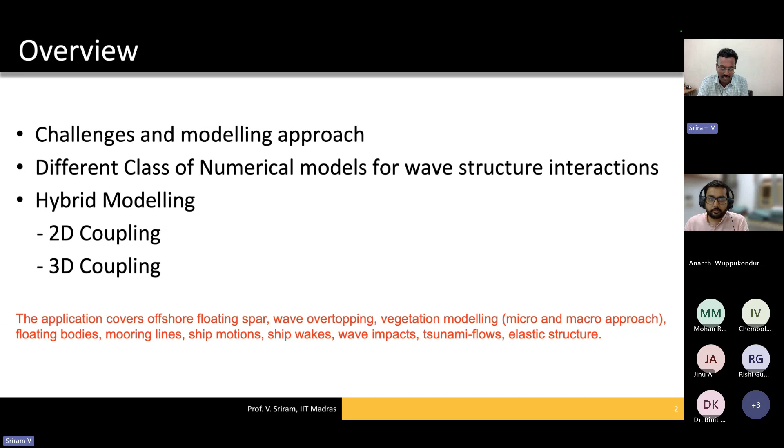So if you look at the motivation or introduction to the ocean engineering part, there are two challenges which we normally have. One is, from the ocean engineering perspective, we are going to have a large spatial domain as well as time scale.

Say, for example, if you have a breakwater or a groin field, the sediment transport phenomena is going to be a large spatial domain, correct? As well as the time scale is going to be of the order of years to develop. So it is not going to be a short-term contribution.

Or in the same aspect, we do also have a small spatial as well as time scale, wherein you are trying to look at the structural impact due to breaking waves, which is of the order of seconds, basically. So that means one needs to develop a numerical model that can understand this large spatial domain as well as the time scale, because you need a large computational domain if you want to model this part.

So how do we approximate, how do we minimize this aspect? And the same way, we also need to capture the small eddies, small phenomena, in order to study the physics behind it. So that means you need to have two scales of problem to begin with. Any numerical model which you try to develop should handle these two aspects. So that was the overall goal, mostly in the numerical model community.

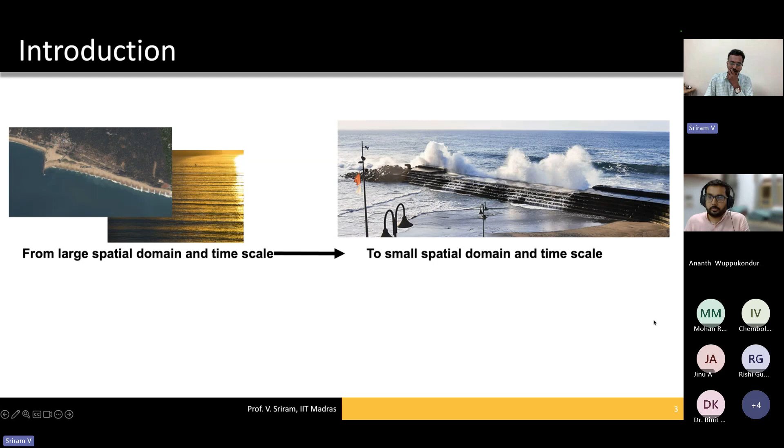So for these different physical problems, people try to use different levels of modeling. If you want to model a small time scale or small horizontal spatial scale, like for example, soil structure interaction or wave breaking or turbulence, you need to concentrate on highly resolved models, or you call them depth resolved models. That's what we normally use. There, the wave structure interaction process is going to be dominant.

Whereas in the case of a large time scale, say for example, a 10 years duration, or after 1 year, what could happen to my entire shoreline? So it's basically morphodynamics modeling, wherein you cannot use the complete physics; you have to go for empirical or statistical based modeling. So when you go for an increasing level of approximation, you have a lot of approximation involved in resolving the spatio-temporal scale problem.

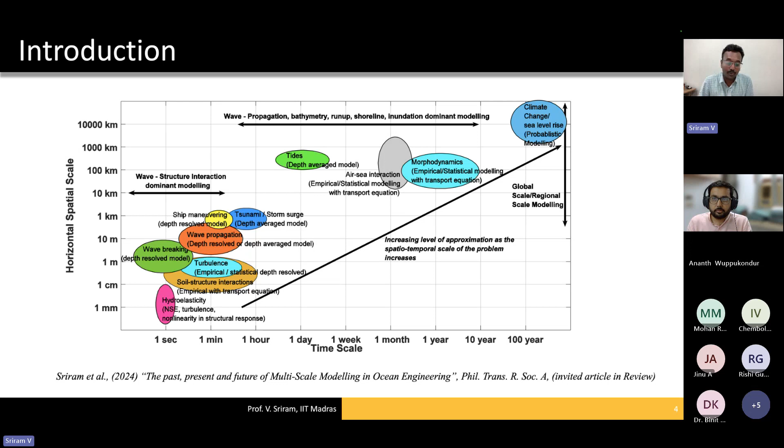But later on, people also thought, is there any feasibility wherein you can actually have only one model that can cover this entire scenario? So that is where hybrid modeling comes into the picture. Hybrid modeling in today's context is more or less well understood when compared to 10 years back. But still there are a lot of challenges, a lot of things which we can improve on. That's what we will try to discuss in this particular talk.

And as I told you, the challenge in the ocean engineering community is basically a large area of hundreds of square kilometers, as well as wave conditions that are completely non-linear. They also coexist with currents as well as sediment movement. And if you are interested in small motions or small eddies, the viscosity and turbulence are going to be important.

And of course, turbulence or viscosity will have some influence on your motion characteristics when you have a violent wave impact onto the structure, or you also need to model the air as well as the water, particularly, for example, in the case of renewable energy, such as an oscillating water column, where you have to model both the aeration part as well as the fluid and wave part.

And then, of course, you are also trying to deal with the hydroelasticity. That means the structure is not going to be considered as rigid anymore. It can be flexible. So how do we model the hydroelasticity problem? So these are the challenges which we have, particularly in terms of the domain size as well as the physics of the problem.

But when you try to do it mathematically, when you try to see the fluid mechanics problem, there are basically two unknowns: the velocity and pressure in the basic fluid mechanics problem. However, in the case of ocean engineering, we are going to also have a third unknown, which is the free surface. So that is also going to be a challenge. So how do we solve this problem? People have come up with different aspects to sort it out.

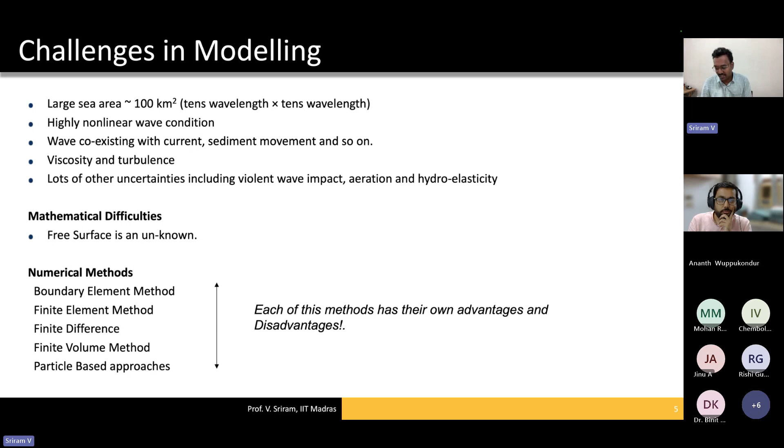So the idea of the research community is to identify the disadvantage and try to improve it. That is how these methods have been developed to a vast extent. So the important aspect is to identify the disadvantage and try to overcome it by using some numerical treatment. So that means you cannot say that one method is superior. That is not the correct word to use.

And the second important aspect is, once you identify the problem, for which type of problem which physical processes are going to be important. This has to be identified before you try to understand the mathematical process, which physical process you want to resolve and which you don't. Because numerically, if I want to resolve all the physical processes, it will be time consuming as well as challenging.

So the idea is to identify the problem you are going to deal with, check whether the physical process is important or not, then come up with a mathematical model, your governing equation with the boundary conditions, and then solve it. So if you look at the physical processes in the case of a large domain as well as a small spatial-temporal scale, I have classified them. Just a simple example; it's not the only one, you can also have multiple physical problems to deal with.

So in general, in today's numerical modeling, we can see that nonlinearity in the fluid is required. And if you look at surface tension, for most physical processes it is not even required. It is not that dominant. Whereas other aspects like viscosity and turbulence may or may not be needed, depending upon the problem.

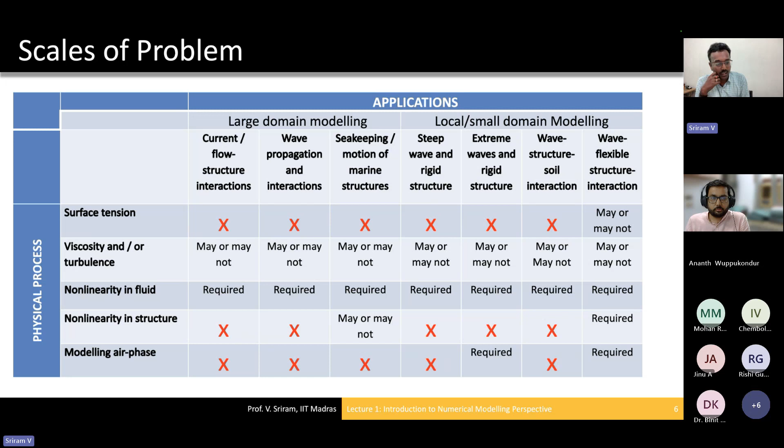And introducing turbulence in the numerical model has to be done very carefully, because some numerical models have their inbuilt dissipation characteristics. So introducing turbulence has to be proper, or used only when it is required. You don't need to adopt turbulence modeling for all classes of problems. That is one of the things you have to take away.

So in the case of wave structure interaction, there are two classes of approach. Normally you go to the experiment, which is the traditional way, do the experiments and try to find out the physics behind it. And the second aspect is the numerical model, which we call a numerical wave tank, as opposed to an experimental wave tank. It's basically a reproduction of the same thing. And in the case of numerical modeling, there are different approximations.

One, you can solve the full Navier-Stokes equation, or you can also do approximate, like assuming it's a potential flow, whether it's a fully nonlinear or a weakly nonlinear, or a depth averaged, that is the Boussinesq model. And then you also have a different class of numerical methods.

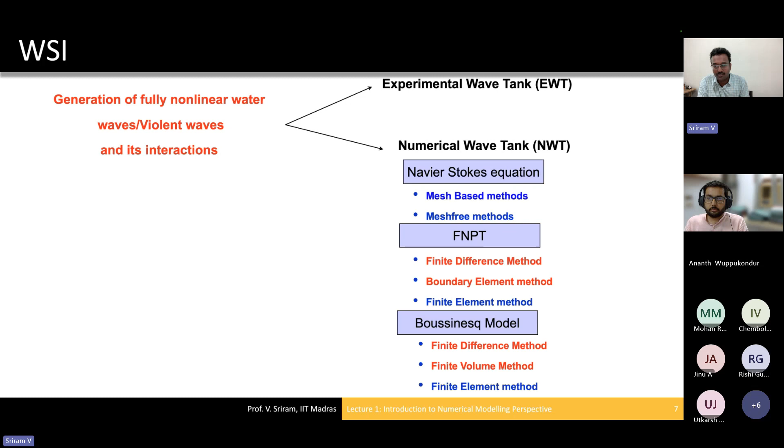So the blue one is basically the methods which at IIT Madras we have developed over the past 20 years or so. And one of the important aspects in the numerical tool development is whichever numerical method you try to use, the numerical method has to handle both the non-breaking as well as the breaking process. See, if you look at some of the existing ones, it may work very well for non-breaking, but it may not work for a breaking process or vice versa.

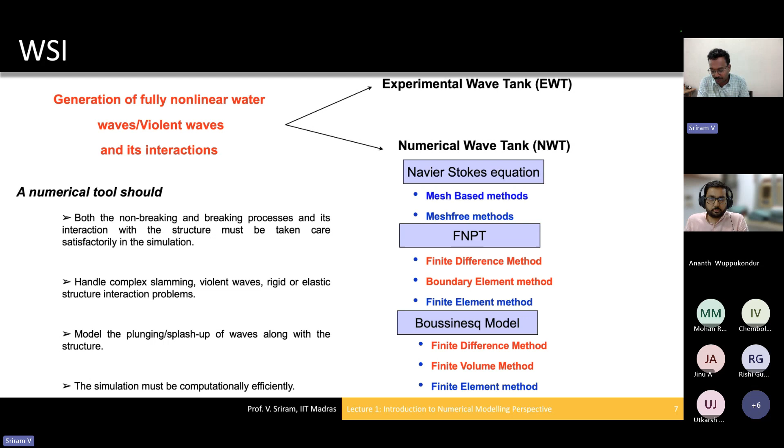So it has to simulate these two extremes, the lower as well as the higher end, perfectly. And then, of course, it has to handle the multiple structure interaction as well as the splash up and all those things as you see in reality. And for the industrial aspect, the simulation must be computationally efficient. So that is what we have to deal with in this entire aspect.

So the other aspect of the numerical model is the difference between verification, validation, and calibration. There is a lot of confusion. Young people have to understand the differences between verification and validation. If you look at validation, it is basically whatever model you develop, you try to validate with the existing literature or the experiments, how accurate or how good your model is.

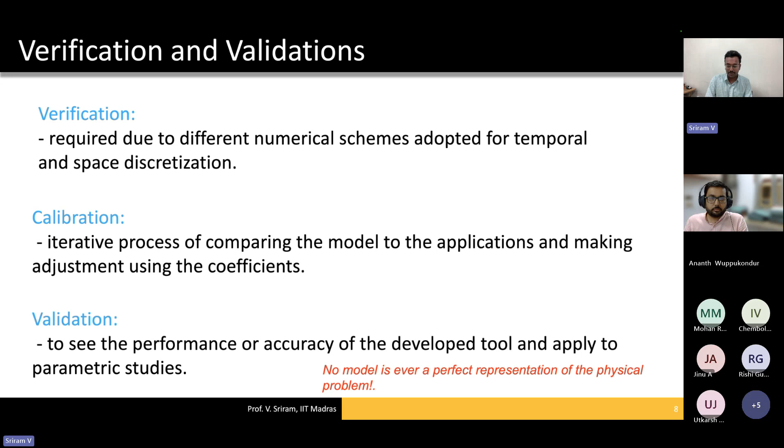In the case of verification, it's nothing but you develop numerical schemes and see how these numerical schemes work for different spatial as well as temporal discretization. So that is basically the verification process. And calibration is basically, suppose you're trying to do some kind of statistical modeling within the numerical model or empirical part, how do we adjust the coefficients in such a way that we are able to have better results for the validation. So that is the difference one needs to understand before you try to develop or use any numerical modeling aspects.

And at IIT Madras, we try to develop time domain models, starting from the Navier-Stokes model to the fully nonlinear potential flow theory to the Boussinesq model. But of course, the computational cost is going to depend upon the physics accuracy. If you look here, the computational cost is much higher for a Navier-Stokes model, as of course the physics we are trying to resolve as well as possible.

Whereas if you look at the Boussinesq model or potential flow theory, the computational time will reduce compared to modeling the Navier-Stokes model, but the physics accuracy is reduced because we make some kind of assumption or approximation in order to solve the particular problem.

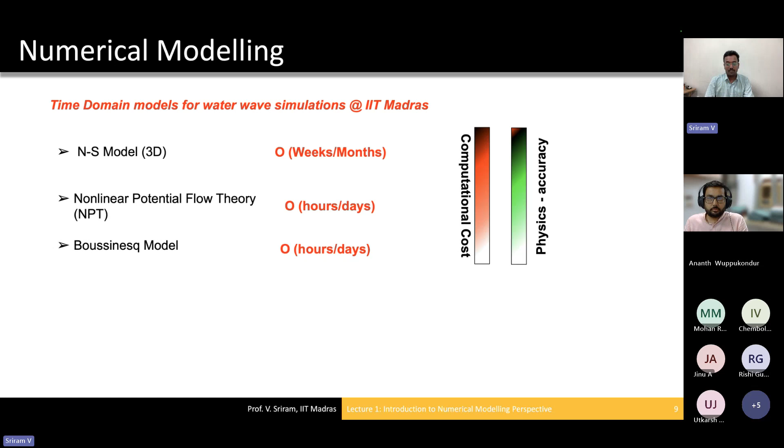So is there any feasibility, is there any way wherein you can combine these models? That is basically hybrid modeling, wherein in the far field you use potential flow theory, and near the structure you use the Navier-Stokes model and try to increase the physics accuracy. At the same time, you reduce the computational cost. So that was the idea of this hybrid modeling. That is what we have been working on for the last 15 years or so in this particular domain.

So before you go to hybrid modeling, you should independently develop and build expertise in the NS model as well as the potential flow or the Boussinesq model. That was one of the intentions before adopting it for a wide variety of problems.

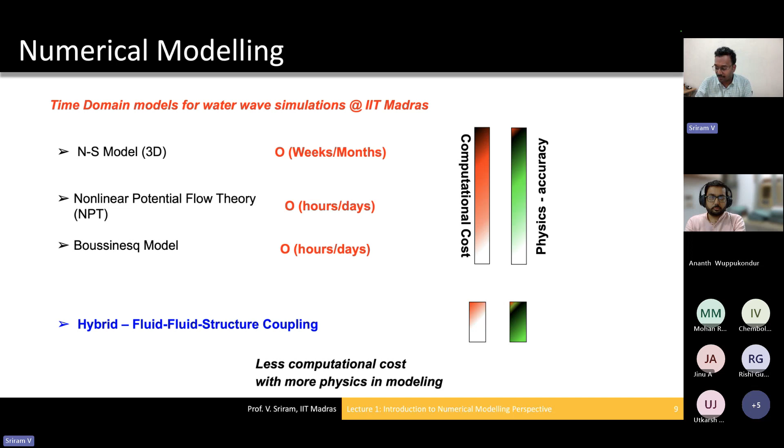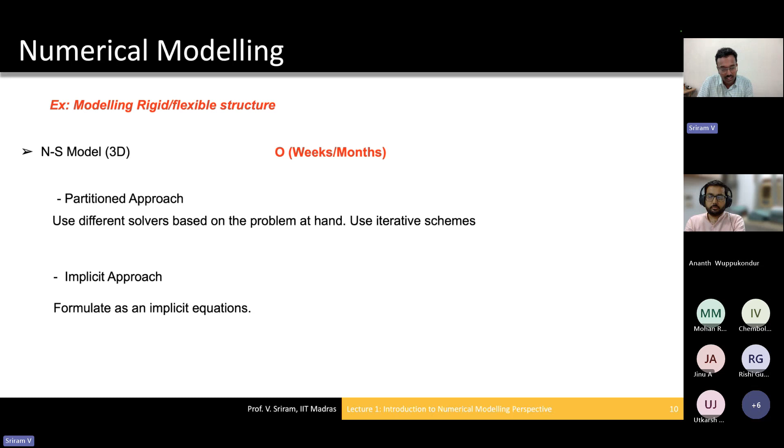And in the case of the Navier-Stokes model, again, there are different classifications: whether you're modeling with the partitioned approach, that means you have different codes and try to put them together in one single tool, or you model the entire thing in a single implicit expression. That is basically formulating a single implicit equation, modeling both the rigid body or the flexible structure along with the fluid. So that was the idea in the NS type of modeling for 3D.

In the case of porous media or vegetation, suppose I want to model vegetation, which is quite common in hydraulics as well as in ocean engineering nowadays with the coastal engineering aspect. In those cases, you may want to model at the microscopic level, to see each and every configuration, each and every shape of the rubble mound stones. Of course you can model it, but the computational time is going to be very, very expensive.

The other aspect is to take a macroscopic approach. I just want to understand only the general behavior of the flow; I'm not interested in the minute details. For example, I want to know how much the wave is going to damp, what is the damping effect, what is the energy loss. If you are interested only in this aspect, choose the macroscopic, not the microscopic approach. So that is how you have to incorporate these things in your Navier-Stokes modeling.

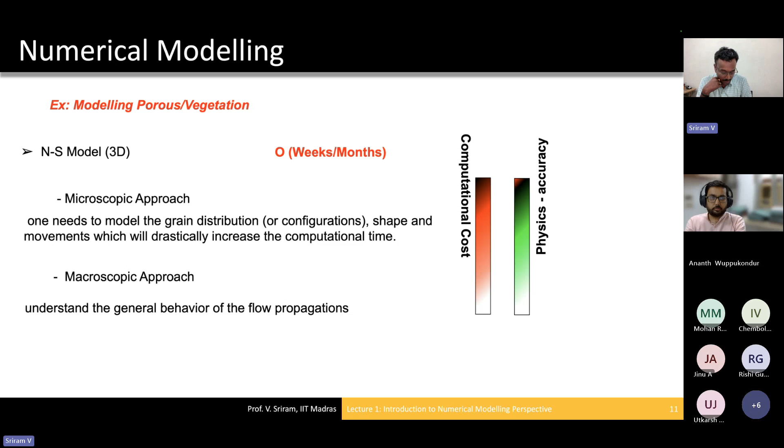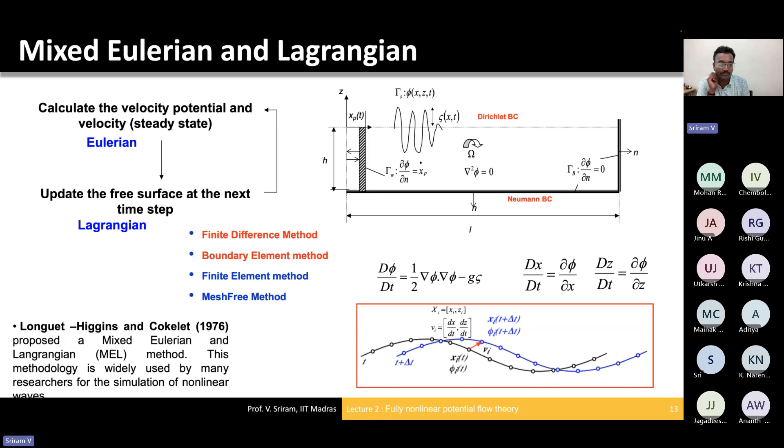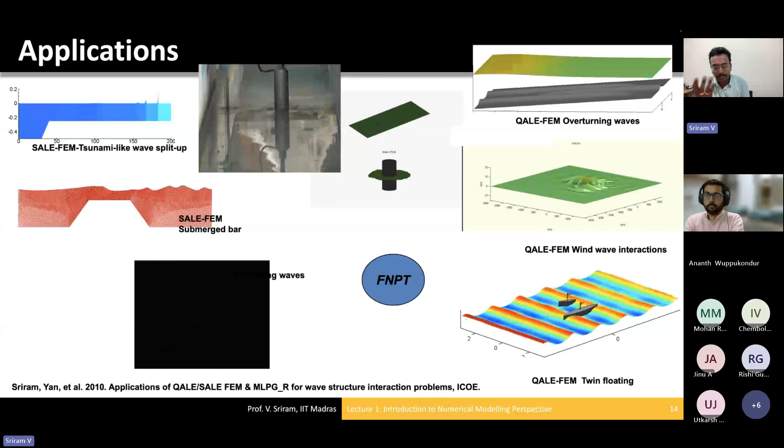From 2004, we have been developing this method on potential flow. We applied it to a wide variety of problems like tsunami run-up, a submerged bar, standing waves, or floating bodies. All those things have been well established, and it can actually have 95% accuracy with respect to the experiments, so far as we have done.

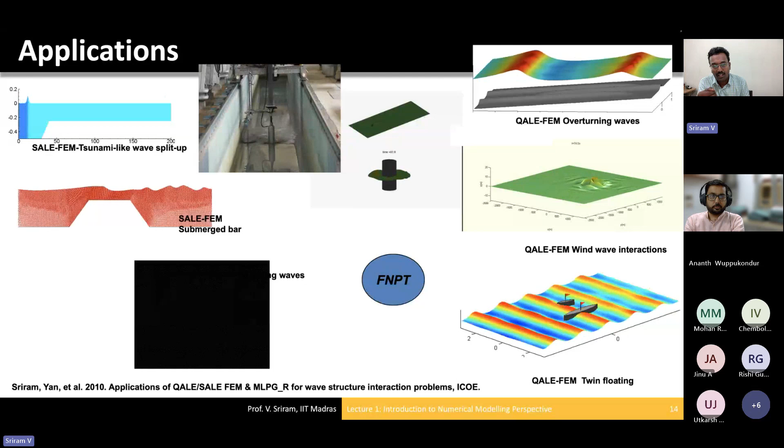But the problem is, as it is a potential flow, it cannot handle wave breaking, or it cannot handle the viscous effects when the viscous effects are going to be dominant. So those are the two limitations in this particular approach.

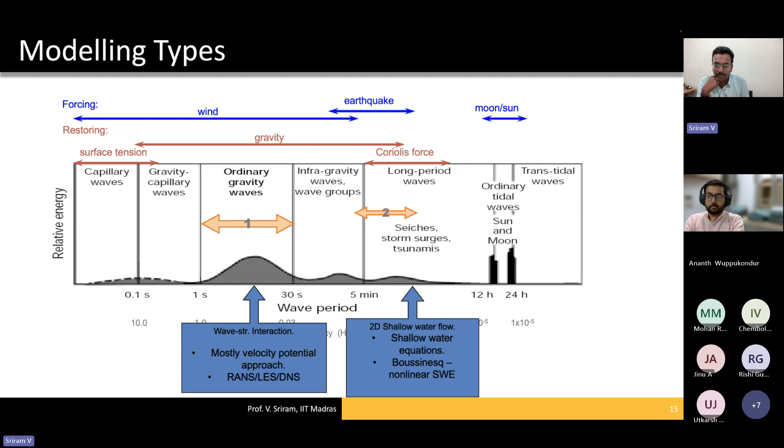The second set is how we model storm surges or tsunamis, which is going to be a shallow water equation or Boussinesq modeling, whether weakly or fully nonlinear. There are different varieties available. Basically, it's how we approximate the horizontal velocities: in the case of shallow water, it is constant, whereas in the case of a Boussinesq model, there is a varying level of approximation which people normally employ.

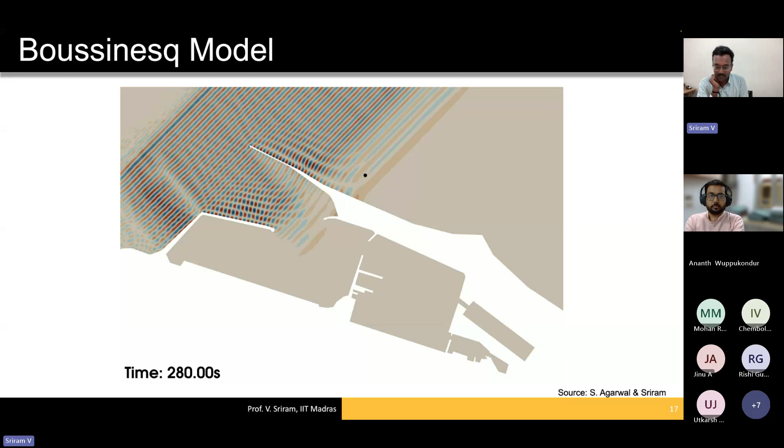In the past, we also developed a finite element based Boussinesq model. Mostly these models are applied for modeling large scale problems, like tranquility inside the breakwater, with the combined effect of reflection, refraction, as well as the diffraction process.

But in recent years, people have also adopted this model, particularly for inland waterways, which is quite popular nowadays in India, where you can see how the ship is generating wakes and how these wakes influence the bank, where the bank is going to get eroded, and how to protect the bank by using vegetation or whatever it is. For these things, because it's a large domain, we cannot use a Navier-Stokes model to model this large domain.

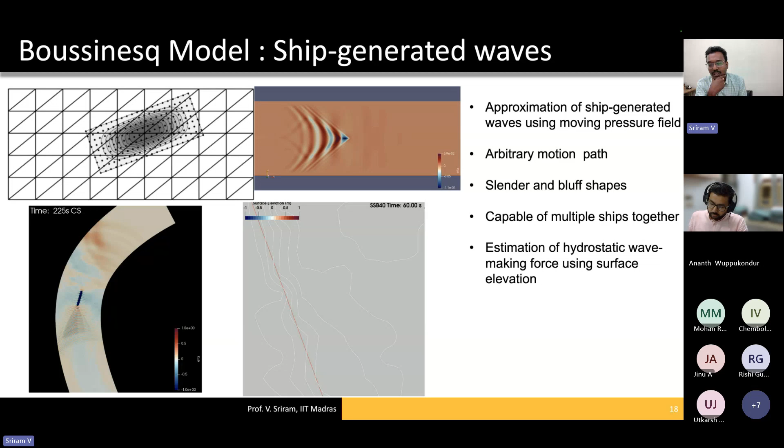So in those cases, these Boussinesq models will become very handy. So these are the two classes which we have developed over the past years. And the other one, the case of a Navier-Stokes solver, is basically there are two different classifications.

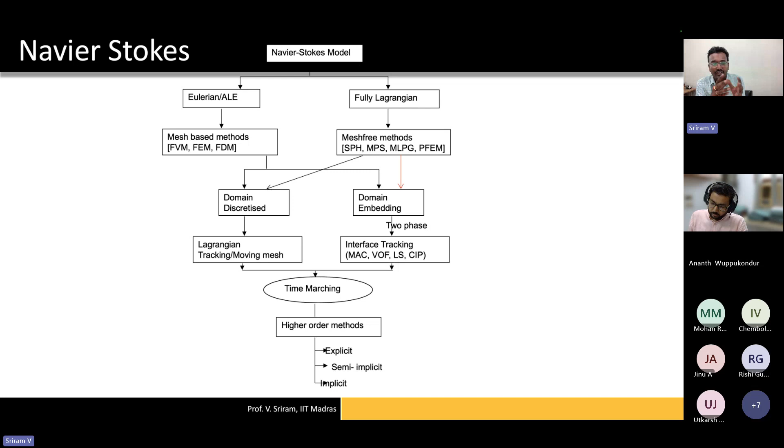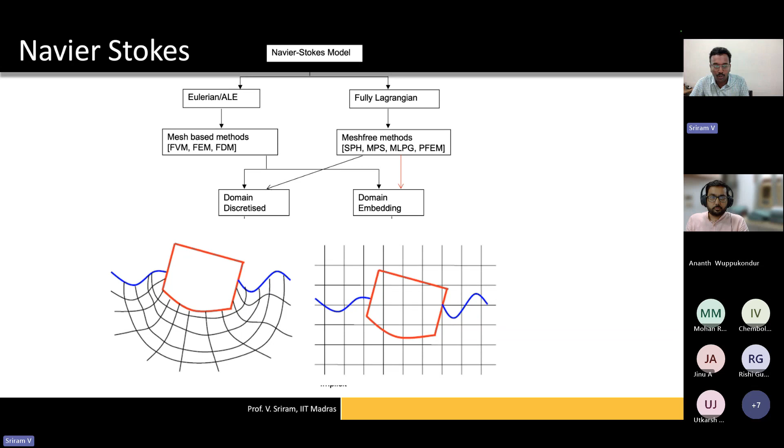One, you use the Eulerian, or you use the Lagrangian, fully Lagrangian, and there are different aspects of domain, whether you discretize the entire domain or you embed the domain by using multiple phases. That is, you have an air phase, water phase, as well as solid phase. So in IIT Madras, we also developed both these classes of modeling, both the domain discretized as well as the domain embedding approach.

And one of the domain discretized, particularly in the case of a mesh-free method, which we are working on, is the MLPG, meshless local Petrov-Galerkin, which basically comes from a hierarchy of finite element families. And in this one, basically we try to use the test and trial function. If you are familiar with finite element, we use a Galerkin approximation. Here we use a Petrov-Galerkin, wherein the test and trial function will be in a different functional domain.

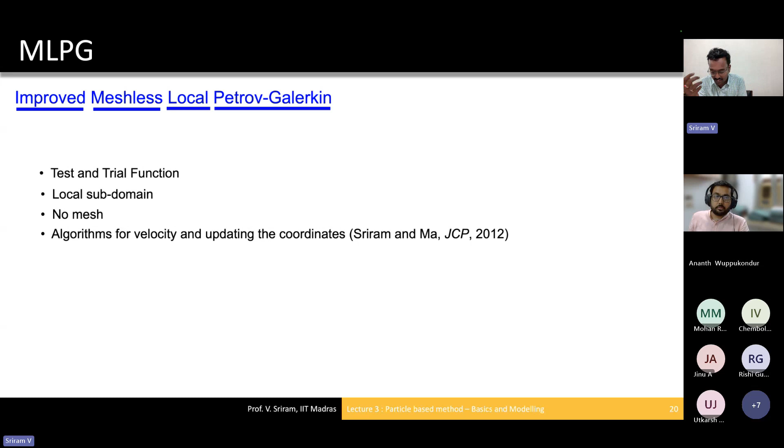And then instead of using the finite element as a global formulation, we will use a local weak form. And then we really don't need any mesh. And then we try to use only the particles to find what is happening here. So the last 15 years, we tried to develop this particular method.

And in 2021, we got an invitation to review this development, which we have done combinedly at IIT Madras as well as at the City University of London, UK, wherein City and IIT have a long-term collaboration, and we try to develop this particular MLPG for application to ocean engineering. We apply it to a wide variety of problems, both 2D as well as 3D.

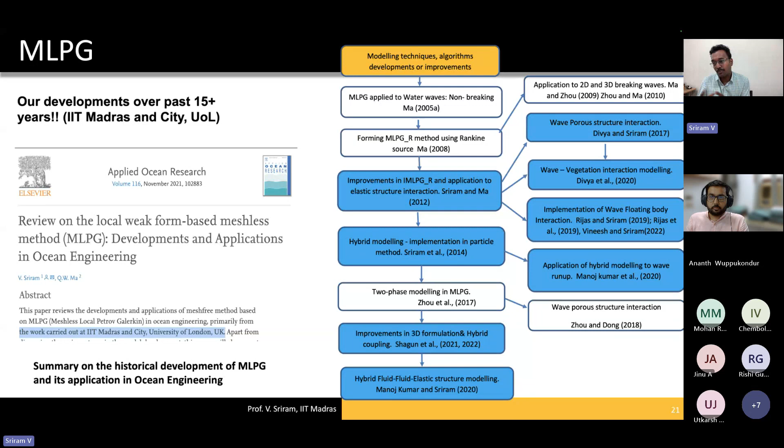So this paper you can actually review, wherein we have tried to explain different aspects, different applications, varying from elastic structure interaction to a fixed body, floating bodies, vegetation, porous modeling. So we have addressed a lot of aspects with the two-phase modeling, how MLPG can take them into consideration, particularly the application to sloshing. You name it, we basically did most of the applications.

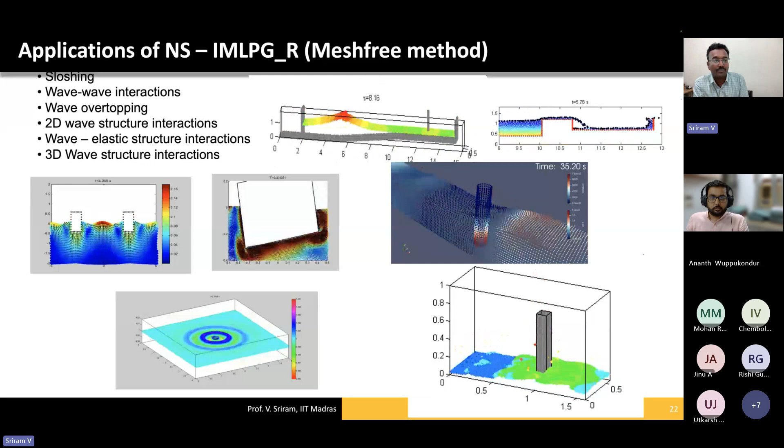But one of the issues with this particular MLPG is that it is still in the research stage. We still have a lot of challenges. We still have a lot of issues. And we try to overcome these issues. So that is the idea behind the entire development of this particular aspect.

And parallelly, we also developed another solver, which is based on a traditional approach, based on the finite volume method. This, at IIT Madras right now, is open source. It is there on my website. You can download the entire tool. You can apply it to a wide variety of problems; we applied it to most of the problems, including floating bodies.

Right now, we are recently developing, as well as we have both non-conservative as well as conservative forms of the RANS solver. And we also have turbulence modeling within this tool, and it's completely MPI. It's a parallel execution in the cluster.

And one of the important aspects of this RANS 3D solver is it couples with the potential flow solver. So that is one of the introductions which we have done, wherein we try to couple this with the potential flow solver, and you can actually reduce your computational time drastically. I'm not going into the detail of these numerical methods, but it's already published. Open source, you can download it, and then you can use it.

You can use it not only for ocean engineering applications, you can also use it for hydraulics applications. If you are interested in dam break flows or hydraulic jumps, we have already tested it for some of the spillways. Of course, it can be used for those aspects too.

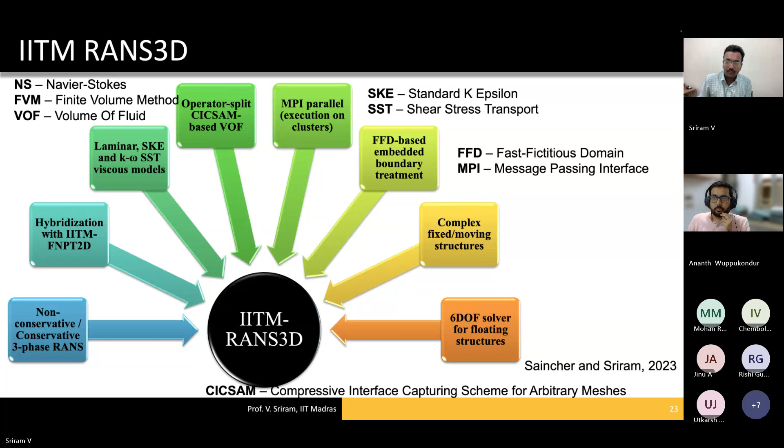And the most important thing, if you use MLPG or if you use the RANS solver, is the computational time. So how do we reduce the computational time? One reason is computational time, but that is not the only thing which we are looking for.

If you use a Navier-Stokes solver, by default, no matter which type of method or approach you are using, there is going to be energy loss when you want to do the simulation for a long time, for a long duration, or for a long distance.

So in order to overcome this energy loss in the Navier-Stokes solver, the idea is to try to couple it with the potential flow solver, which does not have this energy loss aspect. That means one can use different theories for the far field as well as the near field. For that, there are two different approaches. One we call domain decomposition.

We also try to develop the one-way, which means only one-way communication will be there, and there is also two-way communication in the domain decomposition. The second aspect is the functional decomposition, again with and without structure. Both these aspects we have developed at IIT Madras.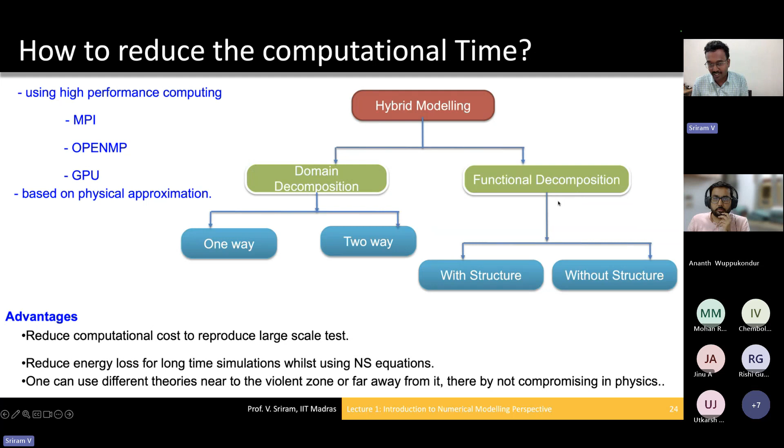One-way communication is where you take the FNPT and give the velocities, information, pressure, everything as an input to the Navier-Stokes solver. Therein you are able to reduce the entire computational time, as well as increase the approximation and accuracy. That's what we found out by using this coupling approach.

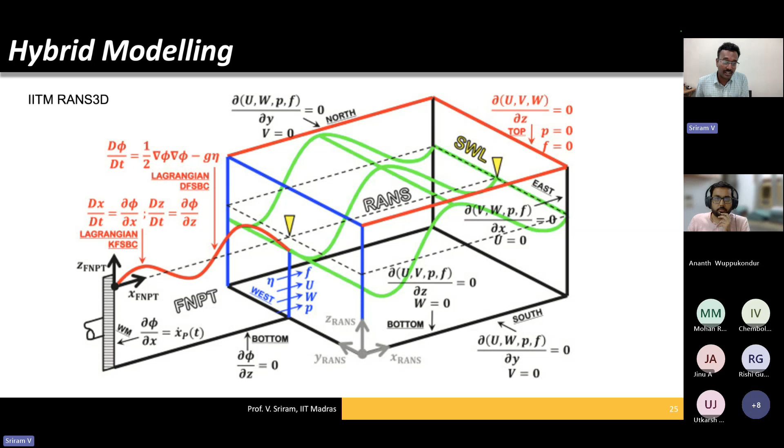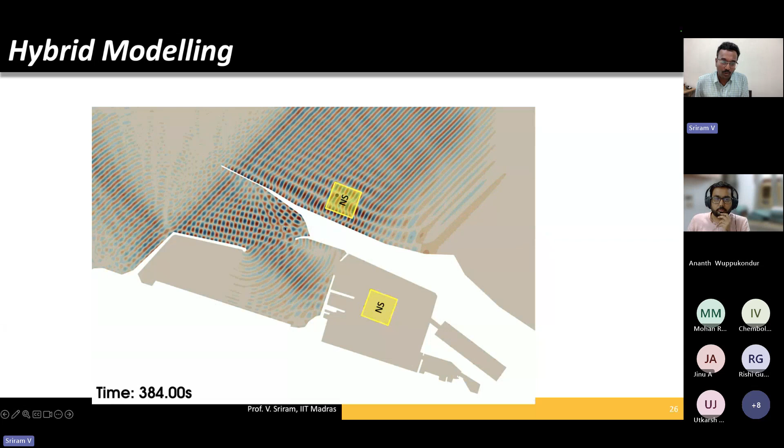This is one way. You can also use the Boussinesq model. Like you have a long domain, you model it using Boussinesq, and then near the region alone, suppose I want to model a breakwater alone, you can use the Navier-Stokes solver. So that was the idea behind it.

And then we also recently succeeded in coupling the Boussinesq model with the particle-based method, wherein you can actually use an entire three-dimensional one and try to study the interaction with the viscous effect. So that was the idea behind this one.

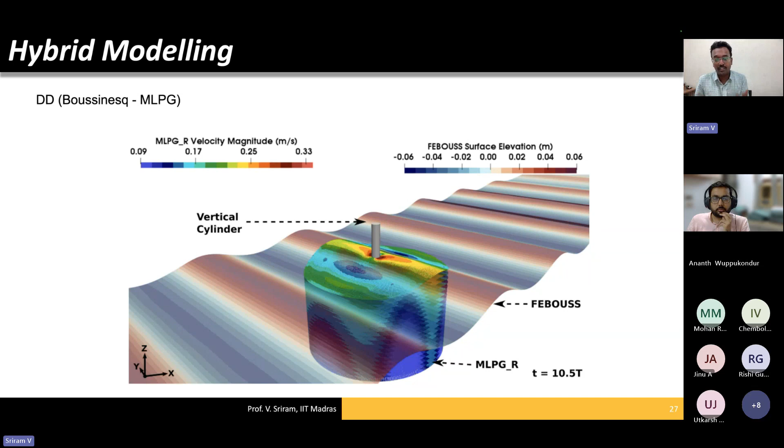The second approach is basically the hybrid. In the previous one, there is only one-way communication. That means the Boussinesq model gives information only to the Navier-Stokes solver, but the Navier-Stokes solver never returns information back to the Boussinesq model. The two things will not run in parallel. So the idea is, how do we do the two-way coupling, or strong coupling? That means you need to couple not only in space, but also in time.

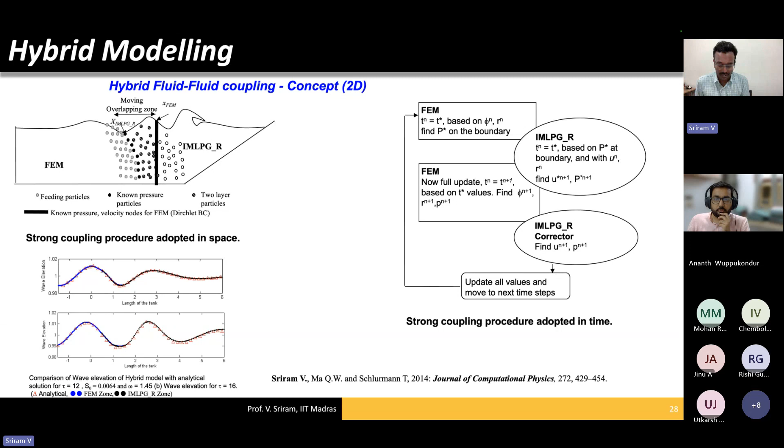It has been almost 10 years now, since 2014, and these concepts we developed are very successful to date. We coupled it in space, and we also have an algorithm to couple it in time. When you have a potential flow solver here and a Navier-Stokes solver there, the waves go over, interact with the structure, and return back. The return effect will also be felt by the potential flow solver.

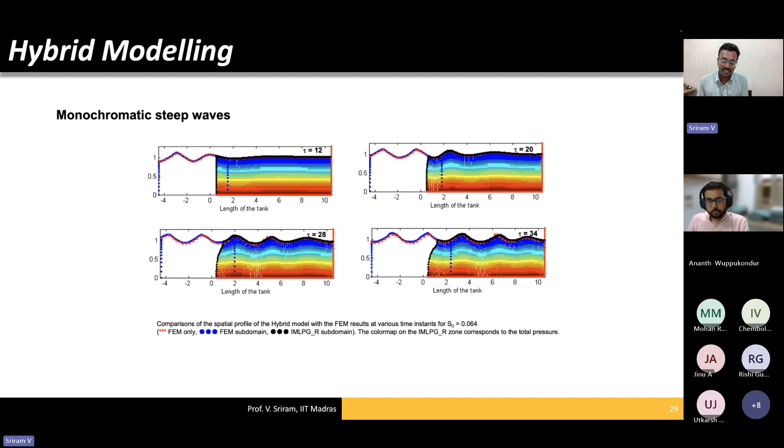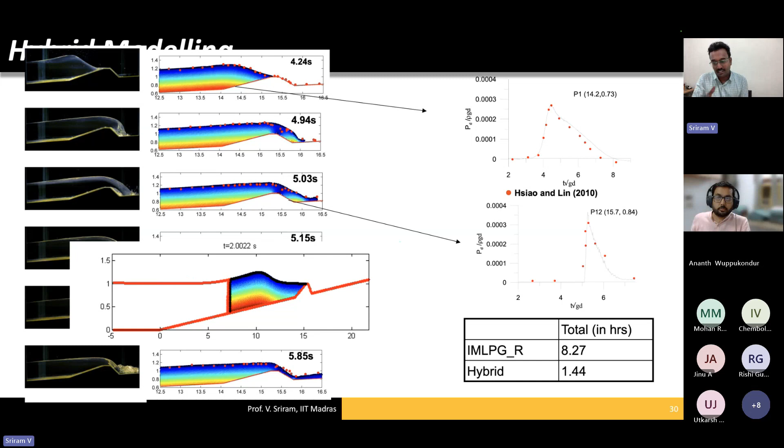That means you run the two solvers in parallel, and they exchange information in real time. This is what we did in previous years, and we saw a drastic reduction in computational time. This computational time is from 10 years ago. Even then, a simulation of 8 hours we could finish in less than 2 hours. Now it will be much faster because of the increase in computational power.

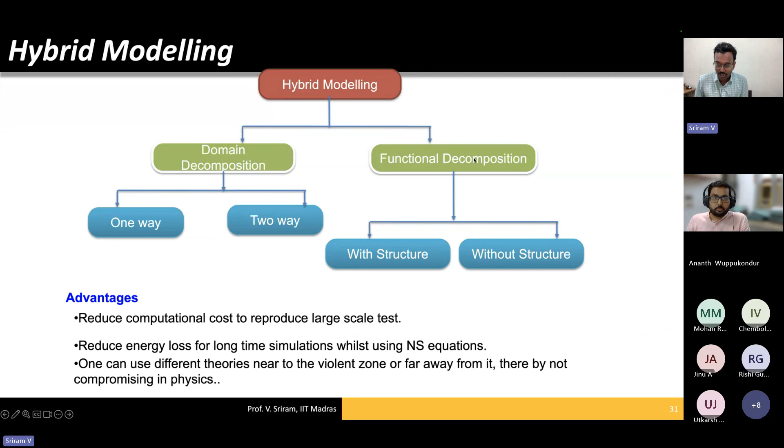The other aspect is functional decomposition, and the idea is very simple. Instead of separating the solver domain-wise into a potential flow solver and a Navier-Stokes solver, in functional decomposition you take the Navier-Stokes equation. We know the Euler equation. If you subtract the Euler equation from the Navier-Stokes equation, you get the complementary part, which is only the viscous part.

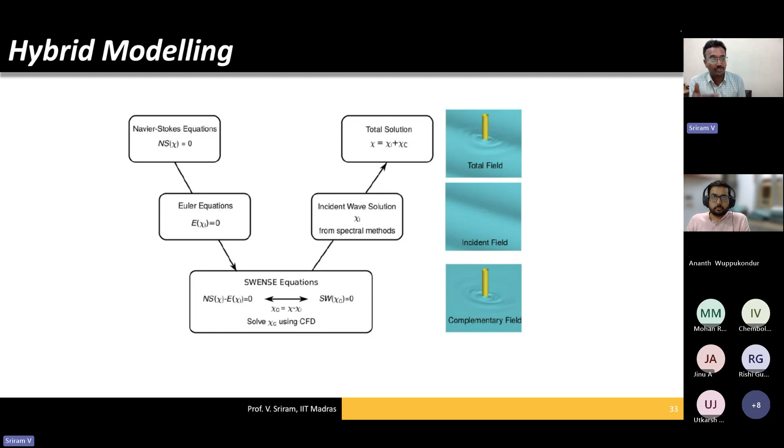You solve the viscous part alone using CFD and add it to your incident wave solution, and you get the total wave field. So you still use the Navier-Stokes, meaning you still include the viscous effect, but your computational time is drastically reduced compared to solving the full Navier-Stokes equation. That was the idea of functional decomposition.

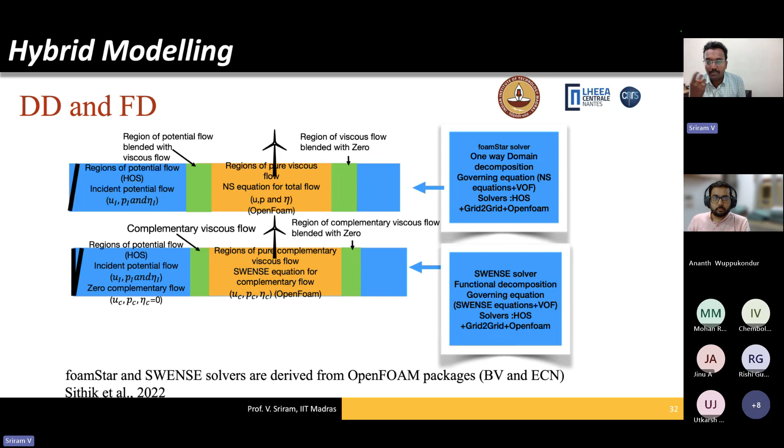This functional decomposition is also quite successful, but there is some limitation related to wave breaking. You cannot model the wave breaking part, so that is one of the challenges, but for the rest of things you can still adopt this solver.

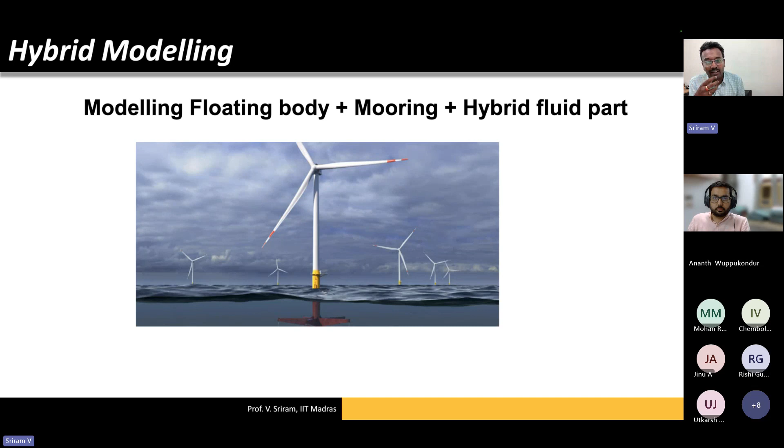And the last one, before I finish, is basically the coupling. Recently, if you look at the floating bodies with the renewable energies, there is a lot of interest in the mooring lines. So I need to also couple the floating body along with the mooring line with the complete fluid part.

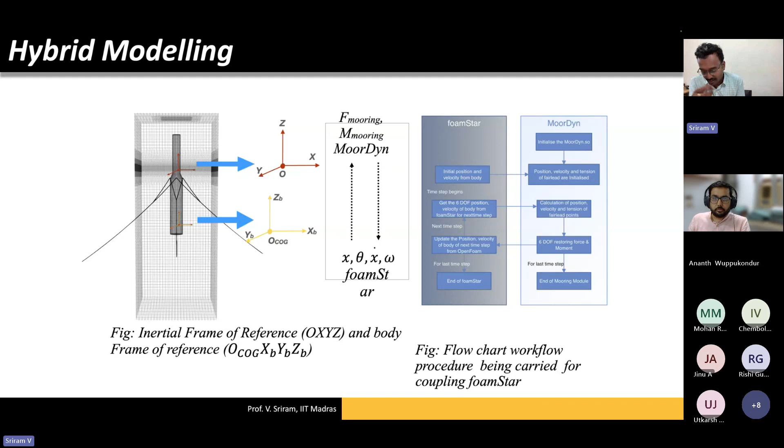So we also try to develop the schemes, particularly to couple the floating bodies with the mooring line. Of course, this floating body you can actually use at a different scale, and the mooring lines you have to use at a different scale, and then you have to couple it, and then there is an orientation. The concept is well established, but the challenge is computationally how we basically interlink the two things. So that is one of the challenges, but concept-wise it is well established nowadays.

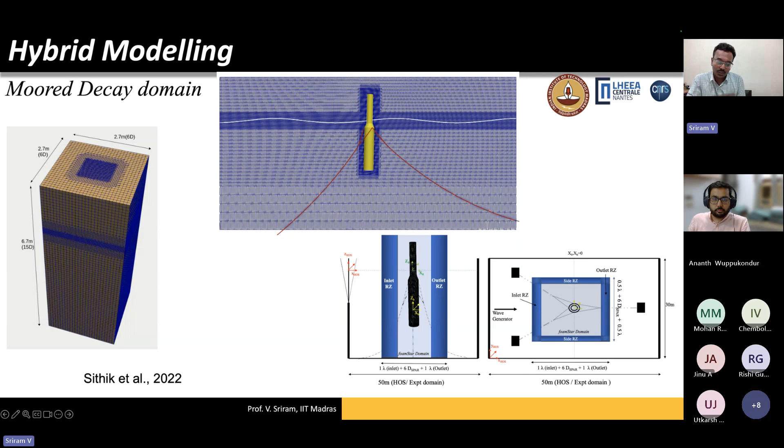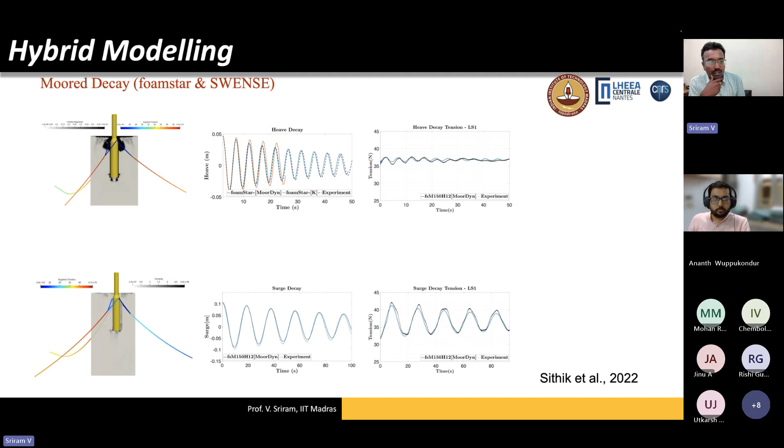And one of my students, Dr. Sithik, also did this particular aspect by coupling, where the far field is basically the potential flow based on the high-order spectral method, and the near field is based on the Navier-Stokes equations, and the mooring lines are also adopted along with this entire process. He tested it for a free decay test with the complete physics involved, and compared with the experiments, both with regular waves as well as random waves. Again, with the experiments, we got a very good comparison of the motion characteristics.

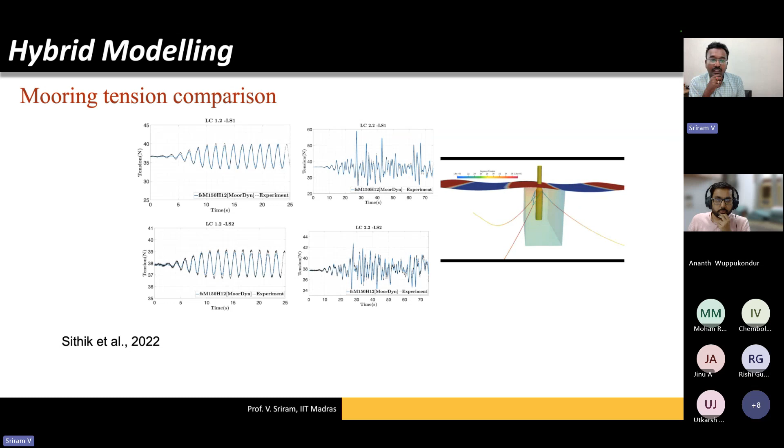Apart from motion characteristics, the tension on the mooring line is also going to be critical, how the fairlead point is going to behave. So that also was quite decent in this hybrid modeling aspect.

And one of the recent initiatives is that, as part of ISOPE, this is one of the first large-scale comparative studies, wherein we released experimental data to the open public in 2019. And then we invited different researchers within the ISOPE community to come up and validate their own in-house numerical models. We didn't specify which model to use or what type of modeling is required, we just simply released two cases.

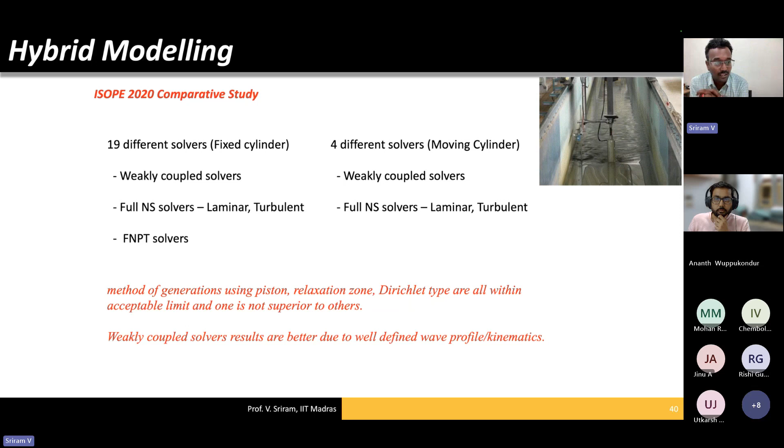One with a cylinder which is moving in a towing tank in a wave flume and interacting with the wave. The other one has a fixed cylinder interacting with the waves. Those are focused waves. And then we invited people, and we got participants from 10 different countries with different types of numerical models, either developed in-house or commercial software. We got about 19 different solvers for the fixed cylinder and 4 solvers for the moving cylinder.

And if you look at it, people have adopted different types of modeling techniques like a weakly coupled solver, a full Navier-Stokes solver, or a completely potential flow solver, because it's not breaking waves, it's only deep focused waves. And looking at the entire thing, we have seen that most people right now are adopting the hybrid modeling concept, that is, at the far field use potential flow, and near field use Navier-Stokes solvers.

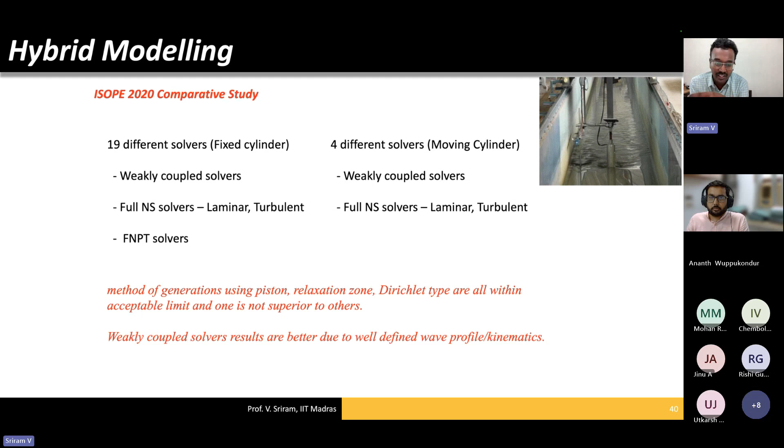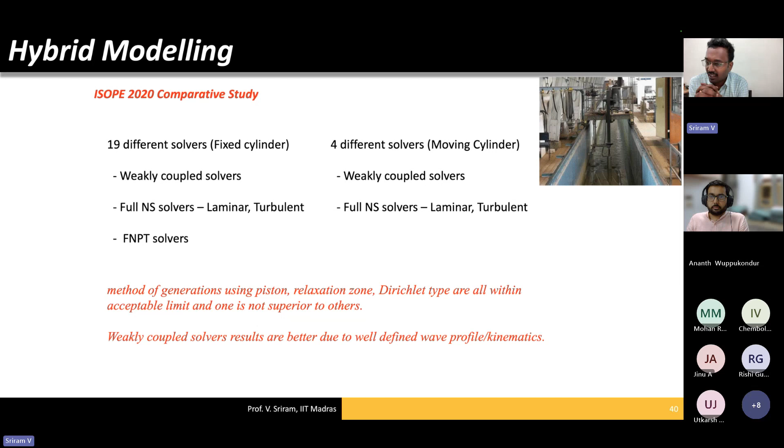The second important aspect we have seen is that irrespective of the method in which they generated the waves, because in the lab we use a piston-type wave maker, people have used piston type and different approaches like relaxation type or Dirichlet type. Irrespective of the type, all of them got decent results, within 5% variation.

And we also measured the pressures. Pressures are also very well compared. So we can solidly say the numerical community nowadays is well developed in this particular area. And for the moving cylinder, we didn't get that many people to participate because of the challenge it involves, because we have to move the cylinder for 15 meters and then it has to interact with the structure.

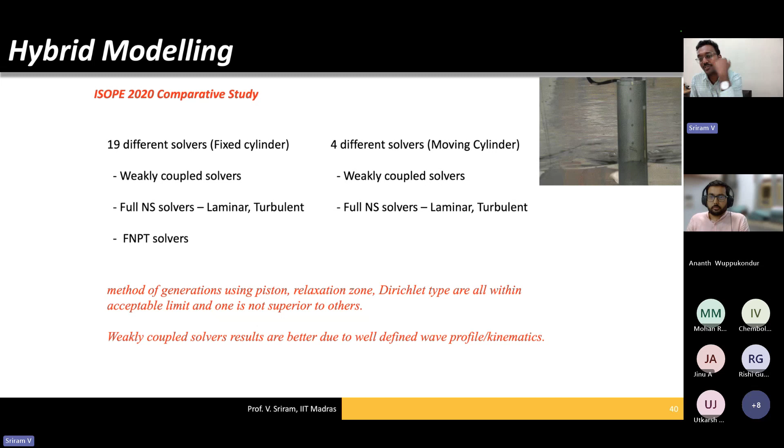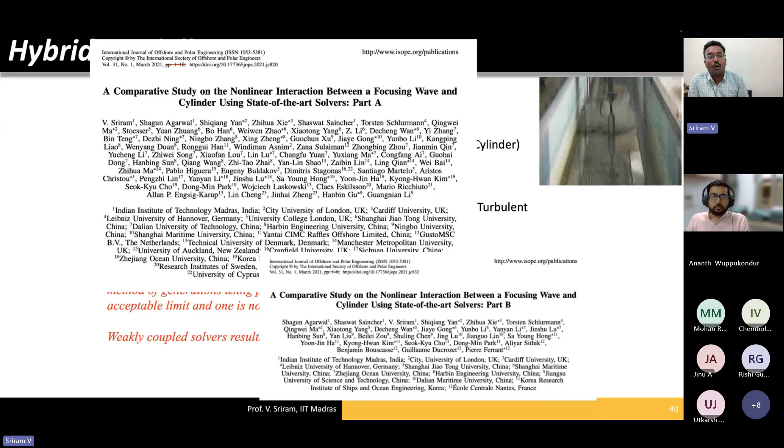So that means you need a really long computational domain, and that is one of the challenges. So we did a decent analysis between these different solvers, and then you can see a complete comparative study of how people have developed and obtained these results, what the conclusion is, and what guidelines we are able to take out from this particular activity.

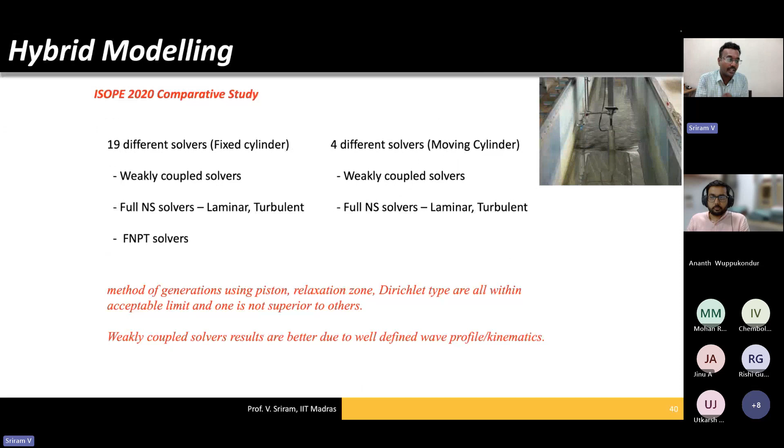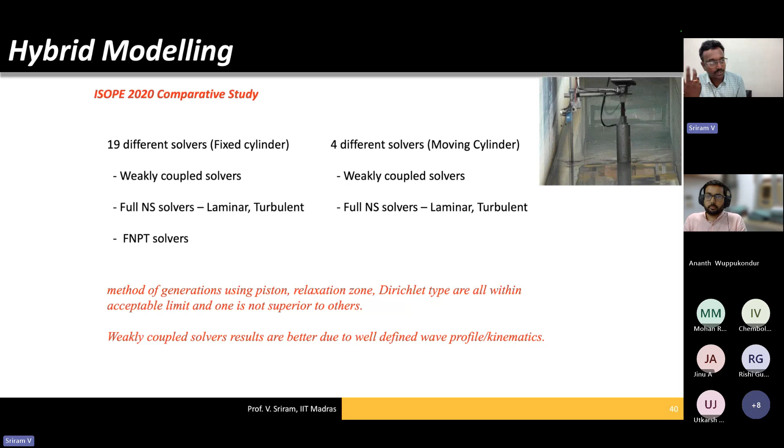So this is from 2020. Recently, in 2022, we also did one comparative study on wave breaking on a vertical wall, which is a curved vertical wall, at large scale as well as small scale. And in the PACOMS, which is going to be held at IIT Madras in October, we are also doing another comparative study. We also released the data for the twin bodies. So that is basically the twin body application we are trying to do.

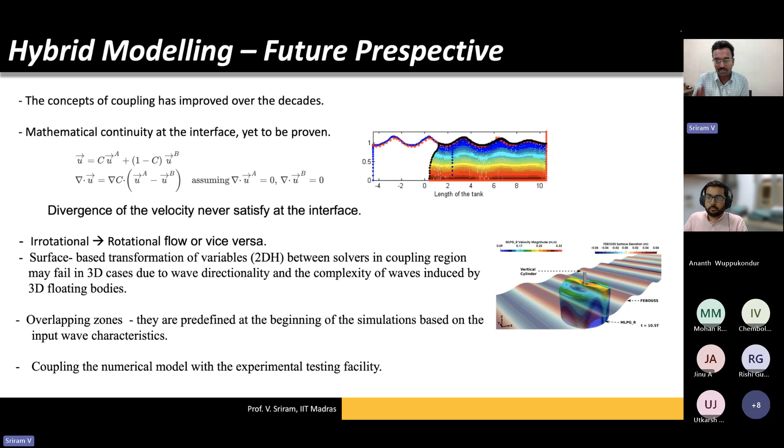And the surface-based approach, like the Boussinesq model, has a challenge in the coupling at the interface, which we have to take care of in the future. And this overlapping zone you have to predefine before you run the model. You cannot define it at a later stage. So that is one of the aspects which we have to take care of.

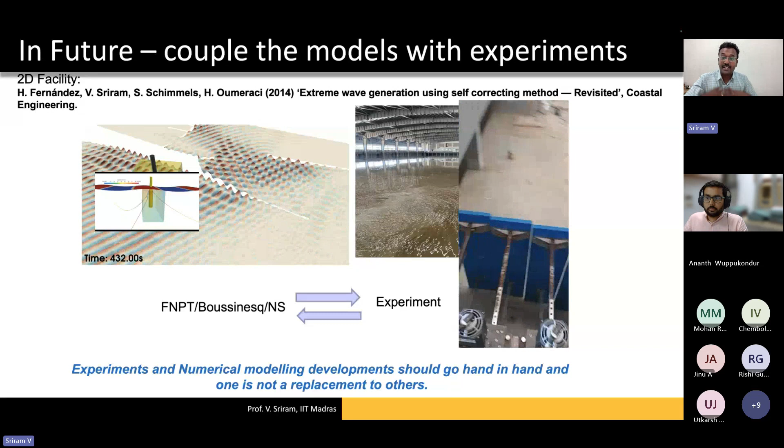And the last but not least, the future is how do you couple the numerical model with the experimental tank. So that is one of the aspects we are trying to look at. This is the recent facility we have developed at IIT Madras to generate waves in a very large shallow basin. If anyone is interested, you can write a proposal and come and access the facility. It's open to everyone. So the idea is how do we couple these numerical models and transfer them to the experiments, or from the experimental results, how do we transfer them to the numerical? So that is the future.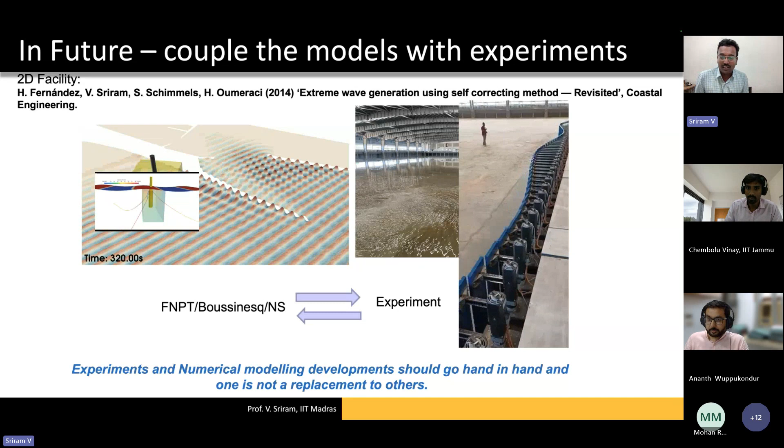And the last word I would like to say is that experiments and numerical modeling are not a replacement for each other; both are important and both should go hand in hand. You should keep this in mind. People developing numerical models will say numerical models are better, and people in experiments will say experimental models are better. But they complement each other, so you have to take care of that in the future. Okay, so with this, I would like to close my talk.